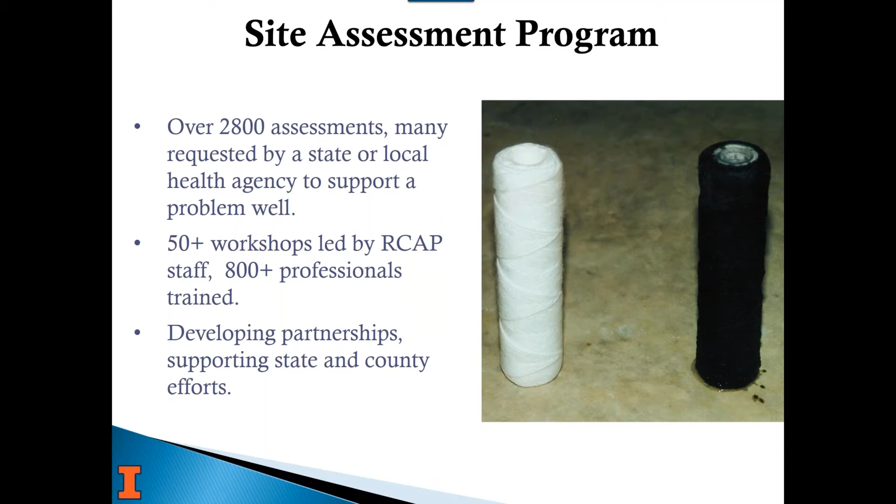So quickly, a little bit about the State Water Survey. We're a really unique agency. We're a sister agency to our State Geological Survey. We're on the campus of the U of I, but we're the only water survey in the country. I think Oklahoma may have started one a number of years back, but we were started because of cholera and typhoid outbreaks. And so we've been dealing with public health and water quality since then.

A lot of engineering, developing groundwater models, looking at water quality. We have a lab that until 2008 offered free water analysis to any well owner in Illinois. State budget problems changed all that. But we also house all the state's well logs. And so in our files, going back that far, there's a lot of really cool information I've been lucky enough to be involved in going through.

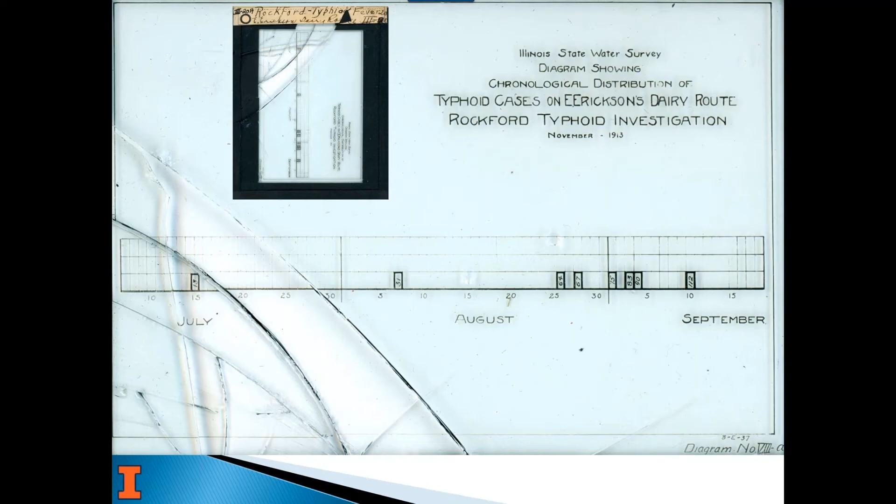Just looking at things like, when a filter plant was installed in Quincy, how it changed the typhoid rates going back before 1900. And this is an investigation of a typhoid outbreak in Rockford, Illinois. They went so far as to investigate if it could have been the milk. And E. Erickson had a dairy route. And obviously, this shows that by September, there were 112 cases, and the dairy route only had 7 or 8 of those. So that wasn't the case. But this is an old glass plate slide that's in our files that dates to 1913. So there's a lot of cool history we have, and I guess I'm kind of proud of all that.

So getting on to what we're here to talk about today. The things to remember if you're a private well owner are that they're not regulated.

Once they're installed, it's really up to you as the owner and the user to be sure your water's safe to drink, and you can't go by taste or smell. A lot of people have problems with sulfur, that rotten egg smell. It's not necessarily dangerous, just like iron stains everything and it's not necessarily dangerous.

But many things that are dangerous, like arsenic, are colorless, odorless, and tasteless. So you can't judge your water by how it looks, smells, or tastes. You really have to sample. I grew up on an old dug well that was not safe. When it rained hard, we had cloudy water.

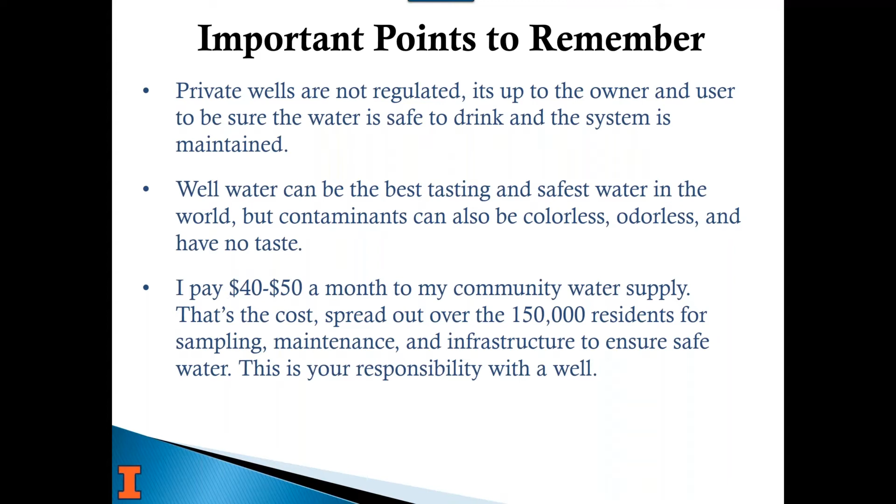And that's your responsibility as a well owner. The best way you can look at it is that you're the water operator for a very small water system, your family's, and take it that seriously. And so that's really the take-home message.

What we hope you get out of not only this webinar, but our program, is that you learn more about your well so that you understand where your water is coming from. Is it a sand and gravel well or a bedrock well? How deep is the pump set? Is the pump in your basement, or is it down in the well? Is it submersible? Do you have a screen or not?

All those things, as well as who you can talk to locally to find out if there's naturally occurring contaminants. Arsenic is a common element in the Earth's crust, and so we see a lot of areas around the country where there's naturally occurring arsenic, and it's just the way it is. But you need to know if it's there. Other areas may have things like uranium or radium. I'll talk more about that as we move through today.

But the point of our class is to give you enough information to understand your well and how it works, your geology and how it works, how water gets into your well, so that when you have a problem or a question, you can ask the right questions and not questions that indicate that you are brand new to a well and have no idea how to take care of it.

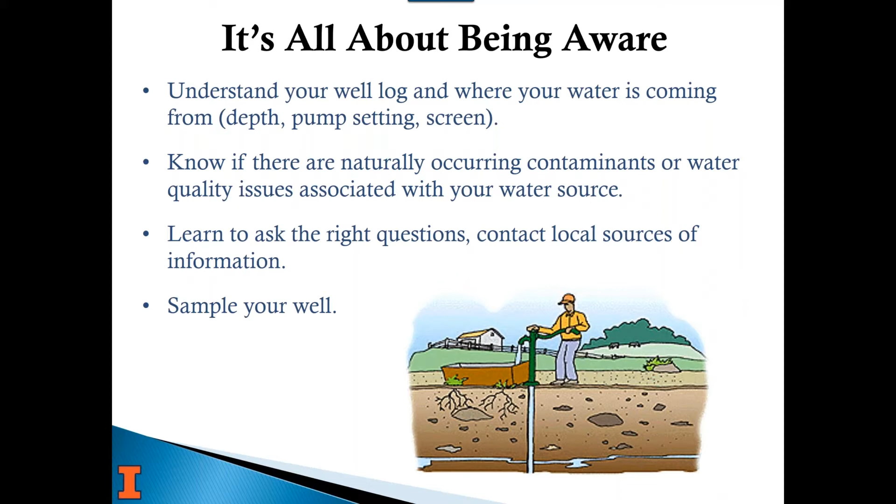And lastly, sampling your well is the most important thing you can do. Even if you have a properly constructed well and there's no natural contaminants, sampling your well just ensures that you know what's going on with your water quality.

The porosity is a measure of the volume of the actual pore space or air space between all those grains versus the total volume of that box. Typically in a uniform sand, we'll have a porosity of close to 30%. What that means is that if you're in a sand and gravel aquifer that's 100 feet thick and fully saturated, if you took all the sand away, you'd still have 30 feet of water below ground.

So they're very prolific when they're large sand and gravel aquifers like that, because water can move through them so easily. You see a lot of areas like along river bottoms where there's irrigation and they're pumping 1,200, 1,500, 1,800 gallons a minute. And they don't see a whole lot of drawdown because water can move to the well quickly and there's just a lot of water available.

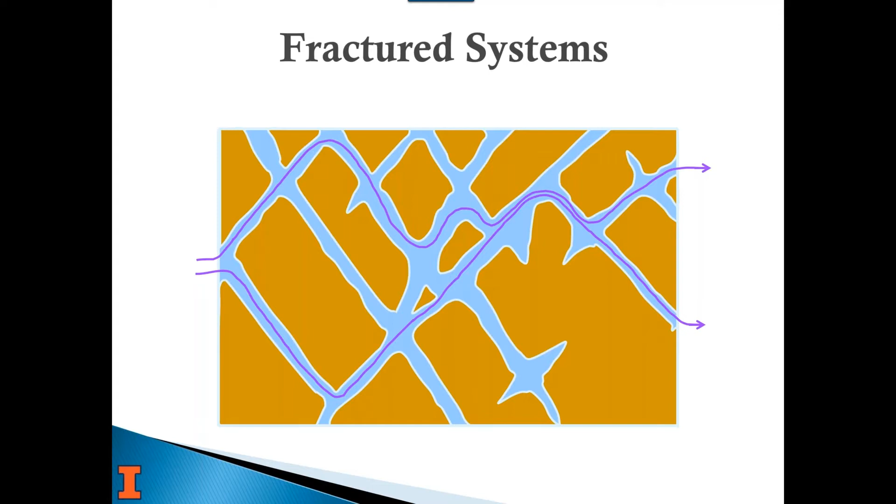Versus caverns and limestone, when you think about Southern Illinois, Indiana, Kentucky, Tennessee, other places that have caves and large caverns, karst topography, those are water dissolved openings. So those fractures are continually getting a little bigger. And over time, with water flow, especially when the glaciers melted, a lot of big caves were formed. And so those store a lot of water.

So we were talking about permeability and how fast water can move through. If it's a large fracture, water moves through like it's free flowing, like through a cavern. But typically, when you start looking at things like shale, shale is really cemented clay, and so it can move as little as 1 foot in 100,000 years.

And so what we typically see in bedrock is you have units as you move down, geologic units, and you go through one, and so you might have a sandstone or a limestone, and then a shale, and then another limestone or some other type of formation that holds water or is fractured. And the shale acts as an aquitard and separates these layers.

And we see in deeper wells, a lot of times, that if you're open to both of those, you can actually influence the water quality from one aquifer to another, because the well bore acts as a connection. And you might hit a layer that's salt water, and you can affect the water quality of your well because you went into a unit that actually has poor water quality.

But it's really about how fast water moves, and that's what permeability means. It's kind of, as I mentioned, the velocity. And so you have units that transmit more water that are considered aquifers, and units that prevent water from moving, like clay and shale, that are considered aquitards or aquicludes.

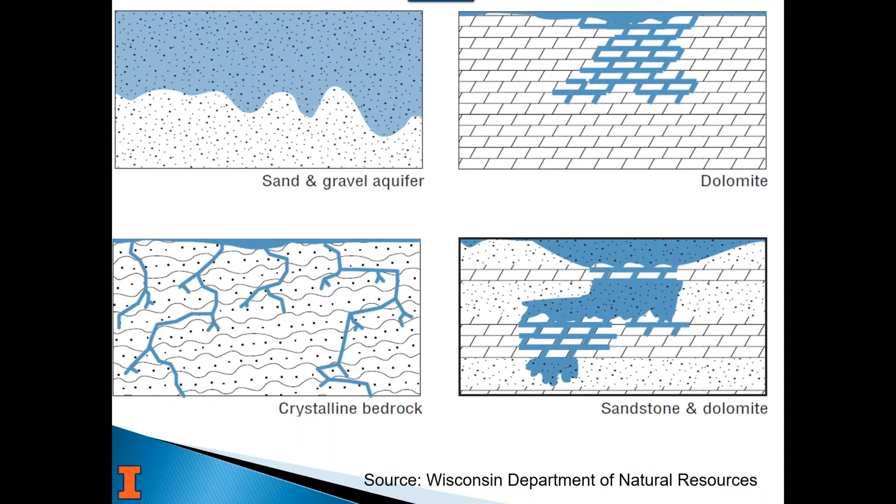And usually these bedrock units are not flat straight across; they're at an angle, and so it depends on where you're at. In one place, the aquifer may be near land surface, and 30 miles away, it may be at 1,600 feet because of the angle of the rock in the ground. It's not flat. Here's another good example of how that works.

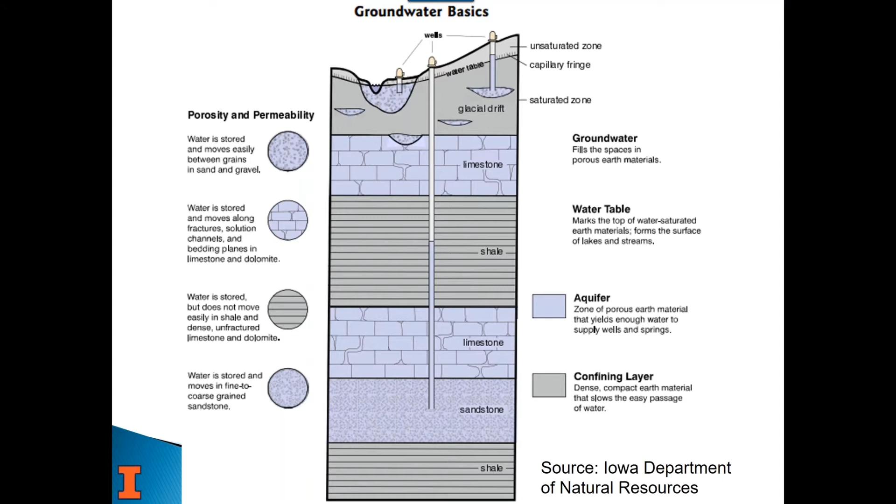I apologize. Boy, we need to redo this figure. It's very blurry, as I notice.

This is really meant to show how water flows. So water is part of the hydrologic cycle, right? Our groundwater is part of the hydrologic cycle. And so the typical cycle you see is it rains, it runs off to a stream, ends up in the ocean, and then it evaporates and starts all over again.

The water that's near your well today will be down gradient in a few days, moving towards some discharge point like a stream or a river or a lake. And so it's a continually moving process. That's why when you hear about plume of contamination, it's because the groundwater is always moving.

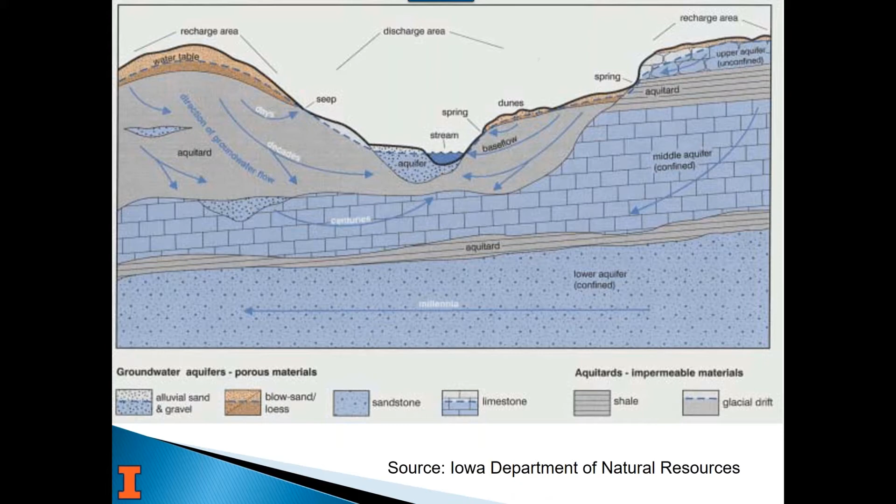So if something gets spilled, it's going to move towards some discharge point. And whether it makes it there or not, or whether it gets broken down before it does or whatever, there is always constant water movement. It's not just sitting still down there waiting for you to pump it.

So a little bit about aquifers and wells. There's three types of wells the way we define it. There's dug and bored wells, which are large diameter, and typically you put a dug or bored well in because there is no aquifer or it's too deep.

I grew up on a hand dug well. It's 3 foot diameter. It's only 14 feet deep. My grandpa hand dug it in 1933. He didn't realize at the time that 80 feet down is a sand and gravel aquifer. And so we had this old dug and bored well.

But if you know there's an aquifer, you'll drill a well, either into sand and gravel or into bedrock. And so it depends. Sometimes you have choices. There may be 2 or 3. Like the shallow sand, if it's too shallow, may be a risk for surface contamination, so you drill deeper, or your driller may explain to you why you might want to drill into this aquifer instead of that one.

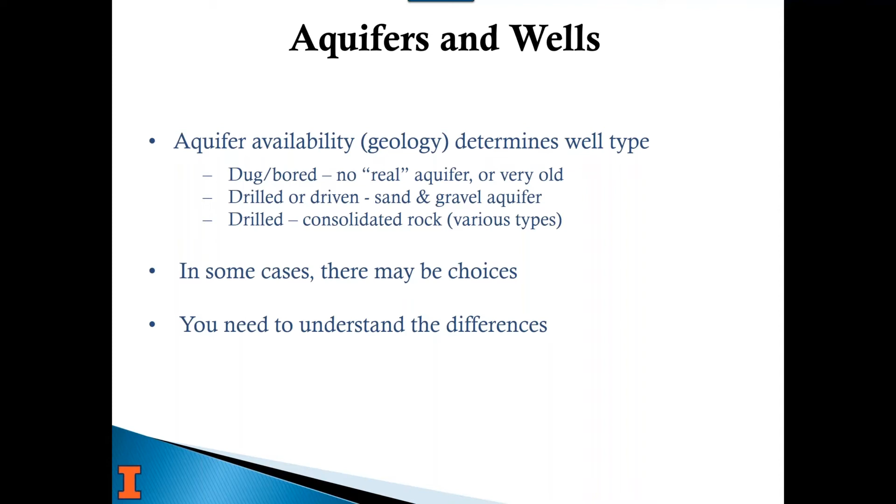But it's up to you to understand the geology and the differences, or talk to someone that's independent, which would be like your state geological survey or your USGS office or your water resource agency in your state. So we're going to go through these. So these are all dug and bored wells.

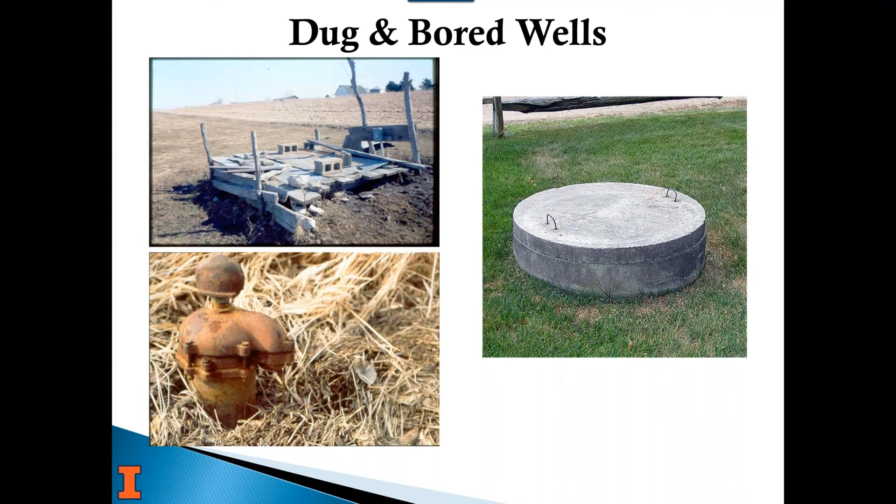And the one on the bottom left is just like the one on the right, except that the 3 foot tile doesn't start until 10 feet down. And that concrete pad has a hole in the top of it for that steel casing. And so it looks like a drilled well, but it's actually not. It's a large diameter well that was bored by a boring machine. So these are those 2 installations, the 2 that are actually bored.

And so the deal here is, the reason you have a large diameter well that's 3 foot or 4 foot, we've seen them as large as 20-foot diameter, someone did by themselves, is so that they'll store water. So there may only be 20 feet of water in this well, and when you pump it in the morning, there's so little water that can recharge. It doesn't recharge very quickly, and so you may pump it down 10 feet, and then when you leave for the day, it slowly seeps back in, and it provides that storage like a cistern would, so that you have water when you need it.

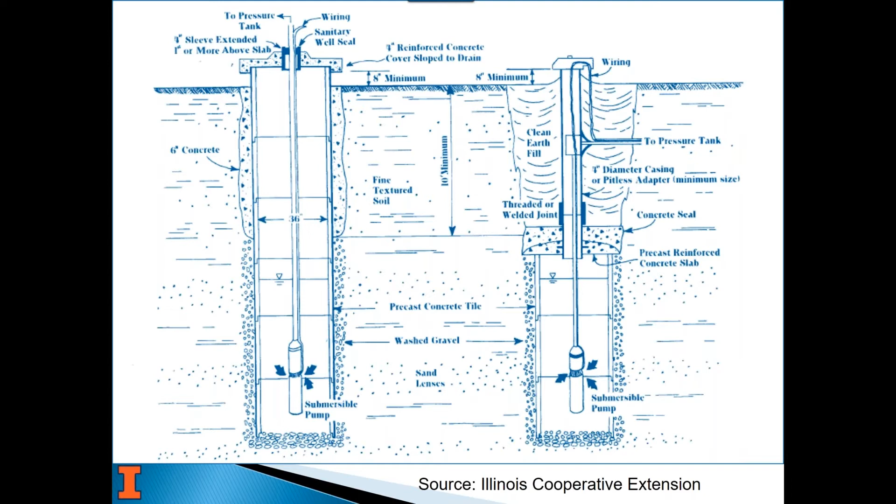So sand and gravel wells, this is a well screen. And it's really just like a screen on your door. A screen on your door lets the air through and keeps the bugs out. A screen on a well lets the water through and keeps the sand out. These are in sand and gravel wells. The casing can be PVC or steel, but usually the screen is woven stainless steel, not always. We have monitoring wells that we use PVC screens, but they're not being used for drinking water, and that would not meet code in most states.

So the driller drills into sand and gravel. He's collecting samples of the aquifer material as it comes up, and he's using the size of those grains, whether they're gravel or sand or fine sand, to size the screen so that it'll keep most of the sand out. And then the other thing you do is you put a gravel pack of uniform size sand around the screen that'll help trap all the fine sand and not allow it to get to the screen. And it acts as a filter, if you will. And it also makes it easier for the water to get there and clean water.

When your well starts pumping sand, it usually means there's a breach in your screen of some sort. That's a quick way to end your pump. They scour the inside of your pump. It won't be efficient. It could damage it. It could also damage your pipes in your home if you're getting sand in your home. And so the screen is there to keep from any of that happening. A lot of times when you start pumping sand from a sand and gravel well, you just have to abandon it and put in a new one. And so it's a bad thing.

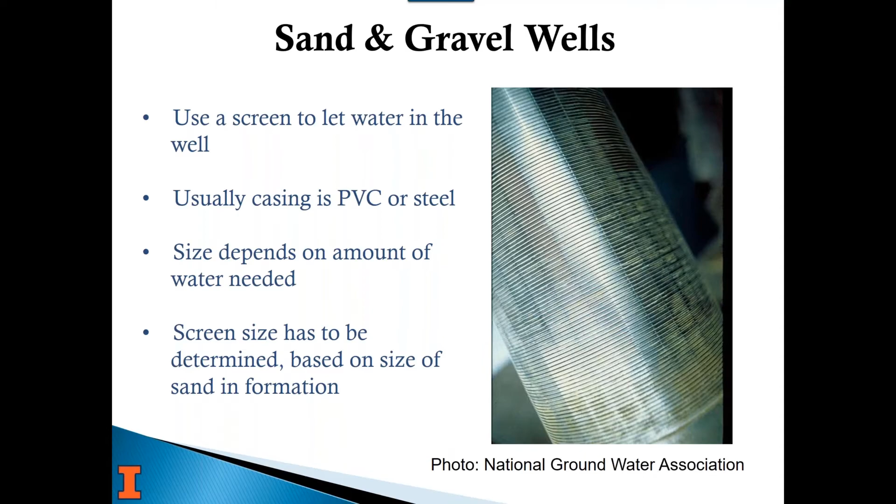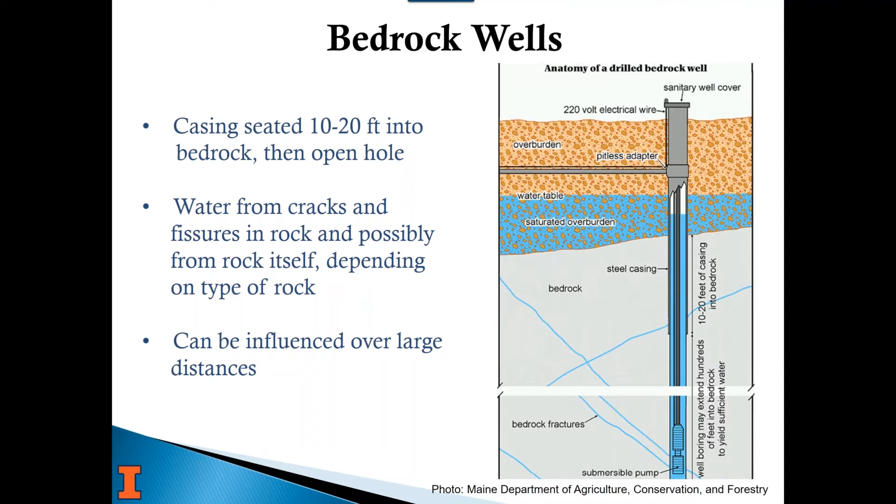Here's a typical well log. This is actually a camp in Algonquin, Illinois. I pulled these from one of our records. What's interesting about this one is when you look at the geologic formations they pass through, they hit broken limestone at 187 to 189, and the very top of the bedrock is always broken and fractured more because it's more weathered. At one point it was land surface. Glaciers came along and filled everything up above it, at least in this part of the country.

So then they had 68 feet of limestone to 257, and then they hit hard gray shale. So they went through 3 feet of it and didn't get through it, and so they stopped. They must have realized there was enough water based on how the drilling was going and the water that they were pulling out with the cuttings, and so they stopped the well at 260.

And so in this case, they put in PVC pipe to 179, which is 10 feet above where you get to bedrock. And then they use black steel from 179 to 199. And that means they seated it 10 feet into the rock. They hit broken limestone at 187. They have a steel casing down to 199. So it's 12 feet. And then the rest of that, there is no casing, and there's an open hole down to 260.

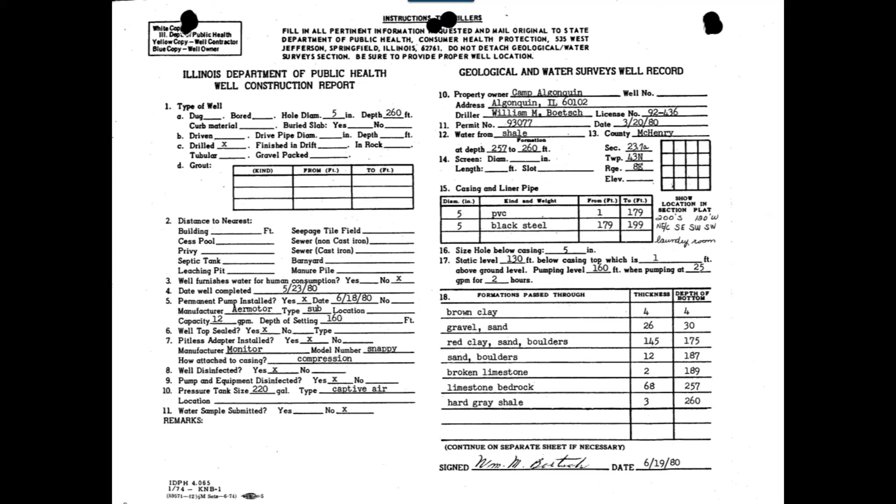But that's one way that they can use their own pump and over pump it, so to speak, and get an idea of how much it's going to use. So yeah, if you look at number 5, the pump they installed was a 12 gallon per minute pump. So it only pumps half as much as what they did whenever they built the well.

Okay, so there's lots of issues out there, a lot more in the news in the last 7 or 8 years than there used to be about private wells. But what it really comes down to is public health protection. So we're trying to protect the water so it's safe to drink and doesn't make us sick or cause long-term problems. It's also source water protection, which is the things we do around not only our well, but near where water recharges an aquifer, which is a huge issue. Whether a septic is causing a problem or livestock or ag chemicals or whatever it might be, and then just general water quality. And so those are the things we're really concerned about.

There are a lot of other things that end up being in the news, drought, flooding. There's a lot going on with flooding these days, because the weather we've seen has been more extreme in probably longer than this, but at least the last 10 or 15 years. And it's really starting to become more regular for it to be extreme. But contamination issues bring up a lot of newspaper articles and things like that.

And even boil orders. We've had water operators tell us that a boil order has nothing to do with a private well. If a community has a boil order, it's because they've had a main break in their water line. And by law, through the Safe Drinking Water Act, they have to maintain pressure in that line. So when they have a break, they lose that pressure, and that means things could get into the drinking water line for a public water supply.

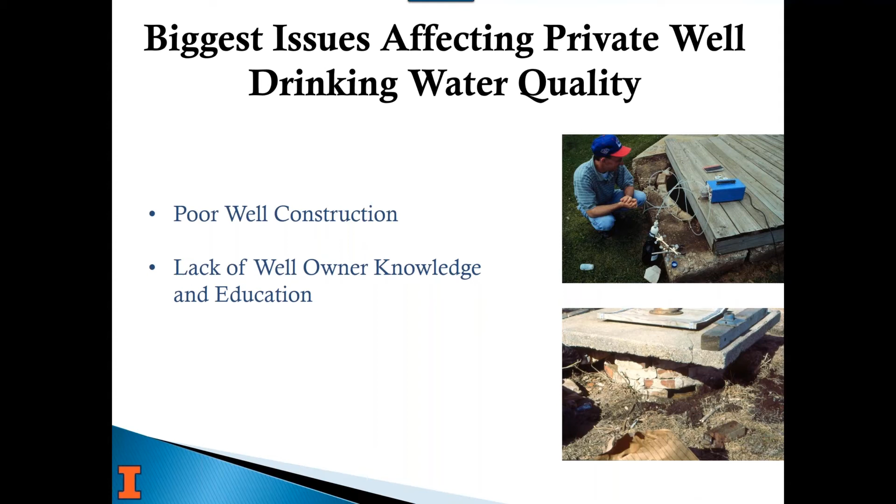And many times we get questions where they may be new to the whole idea. They've always had city water. And it's a concept that takes some effort to learn about your well and how to take care of it and what all that means. So again, those are the two biggest issues we have. And if we could solve those two things, I think we'd eliminate about 90% of the water quality concerns with private wells.

So going about correcting poor construction. Most states have well construction code, two don't. But even those codes have changed a lot. I know in Illinois, the first well construction code was in 1968, and it's been changed probably dozens of times as we've learned more about what works and doesn't work, what's safe and isn't. Materials change, all those sorts of things. But in every case, in every state that does have construction code, only new wells had to meet that.

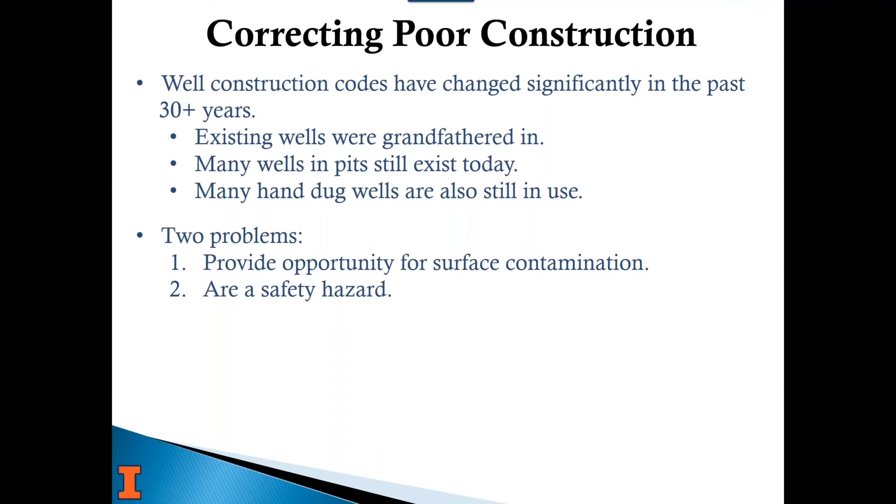So you have wells that are before any kind of code, or maybe were from the original codes that weren't as protective as they are today. And because they're all grandfathered in, we see all kinds of wells, especially in rural areas. The well that I grew up on was hand dug in 1933. I mentioned it's still in use today, and it shouldn't be. It's just that simple. It's not safe. And we still see wells in pits, as I mentioned. They're both a safety hazard and an opportunity for surface contamination.

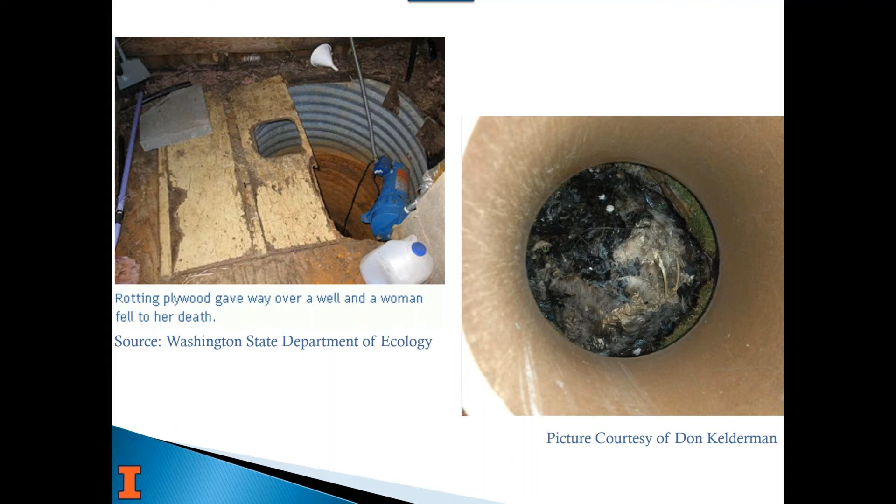So what should you do? If you can, bring it up to code, talk to your state agency that has well construction code. You're doing this voluntarily. They can't make you, but you want to do what's going to protect your well water from any kind of surface contamination or worse. So if it's a well in a pit, for instance, you can extend the pipe up to land surface and fill that in, and install a pitless adapter if you need to.

A pitless adapter is a unit that fits in a well that allows you to basically elbow your pipe from your submersible pump into your home at like 3 or 4 feet depth. That's typically done when you have a frost line, so in a northern climate where you have freezing weather and there's a frost line in the soil every year. In some areas we see all the equipment out by the well, like the pressure tank and everything else, because it never freezes in some southern climates. So it's different depending on where you live.

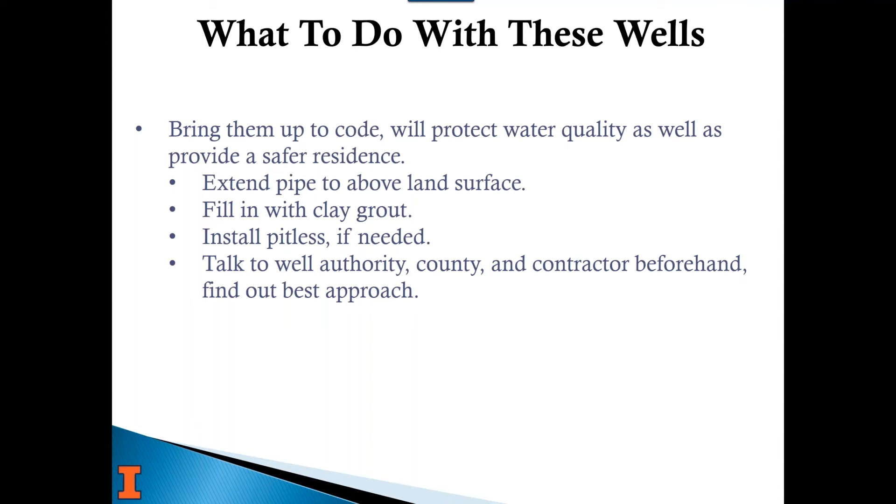But talk to the folks in your area that know how to fix those things, have them take a look, ask if there's anything wrong, especially about your well casing and making sure your well's properly protected at the surface. Same thing with abandoned wells.

Since well logs weren't required to be filed until the 60s or 80s or even later in some states, there are many more wells out there that we don't have records for, and that's in every state, than there are wells that we do have on file. As an example, Illinois passed a law in 1968, and I did a project where we were trying to identify all the wells in 9 rural townships. There ended up being 1,706 wells. In our files, we only had logs for 788 of those, so less than half.

And you have other states like New York where they didn't pass the rules to require a well log to be filed until 2000. So they estimate they maybe have 10 to 15% of their well logs on file of the wells that are actually out there and in use. But many more of those old wells aren't even in use anymore. The old house was torn down, the son or daughter put a new house in, they decided to put in a new well. That old well just sits there, everybody forgets about it.

And they're not only a safety hazard, but also a source of contamination if they go down to the aquifer. Anything that gets spilled there or can get in it, or eventually, depending on the type of casing, it will go bad. So the best thing to do is to properly abandon and seal it, so that nothing can get in it and no one can get hurt.

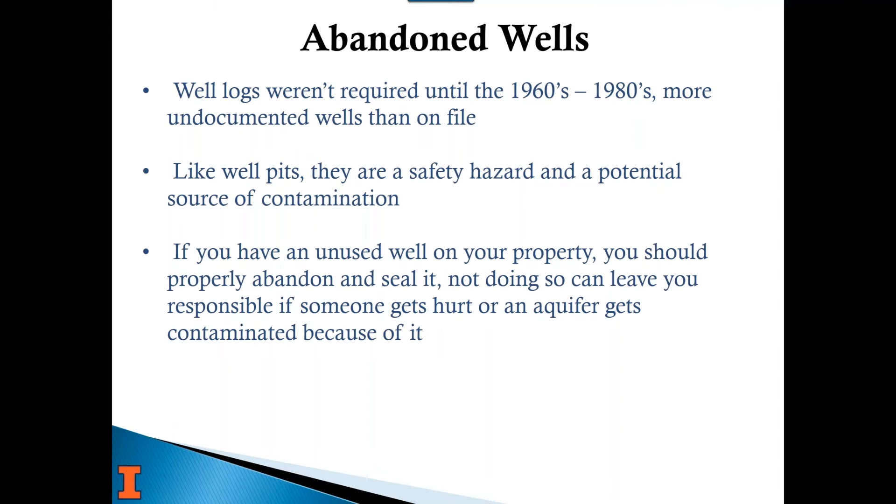It was covered live on CNN for over a day, I think, and they dug her out and she was fine. She's a mother of 3 today, but some people aren't so lucky. They fall in a well, and a number of people get killed that way.

Okay, so aquifers versus aquitards. An aquifer is the unit where you're getting your water from. And in my field as a groundwater hydrologist, an aquifer can mean different things to different people; what is an aquifer to one might not be to another. So for an example, if you have a home and you need to pump 5 gallons a minute, you might be able to put your well in a specific geologic unit that'll pump 5 gallons a minute.

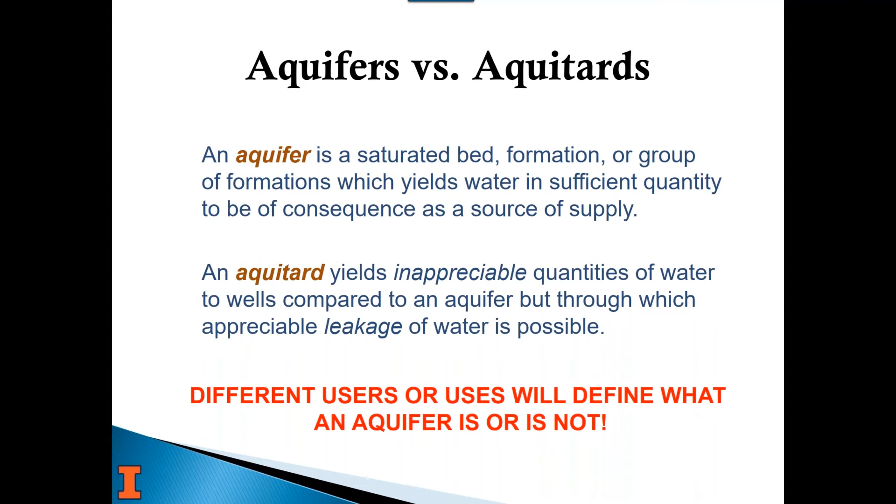enough of that. So whether it's confined or unconfined: an unconfined aquifer is one that's really not full. It's got a free surface, so it actually has air. It's open to the atmosphere. And so the water table is such a thing, and it's considered a water table aquifer, versus both examples I used of those wells, where the water level in the well came up above the top of the aquifer. That means it's confined. It's under pressure. So the pressure in the aquifer is greater than atmospheric pressure.

And so how far it comes up in the well is a matter of the extent of the aquifer and where that pressure is coming from. So you can think of it like a juice box. If I put a straw in a juice box, nothing happens if I'm just holding the juice box. But if I squeeze it, then juice shoots out the straw. And that's what a confined aquifer is. There's external pressure somewhere away from your well that's causing the water level to rise in your well up above the top of the aquifer.

And that likely means that there's a recharge area somewhere farther away where the water levels are higher, because water wants to be flat, right? You think about water in your bathtub, it's all one flat surface at the same elevation. If you pull the plug, water starts running out. Where's all the water run? It runs to that low spot. So it's the same thing as if your drain were a well that you're pumping. As you pump water from your well, all the water surrounding it's running to it to try to make it level again.

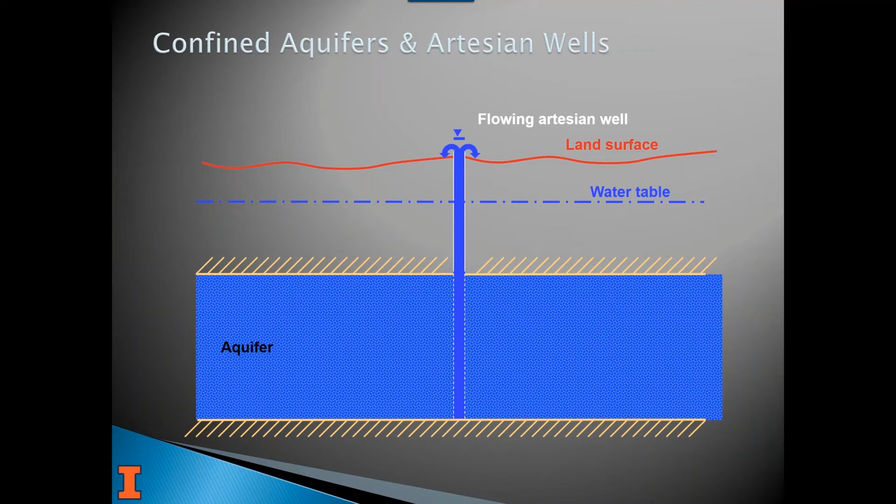We have a few small areas in Illinois and in a number of states. There are areas where, just the way the geology is laid out and the elevations and where the recharge areas are for some aquifers, you can have these flowing well situations. So we're updating this figure because it's really poor, but I'm going to use it today.

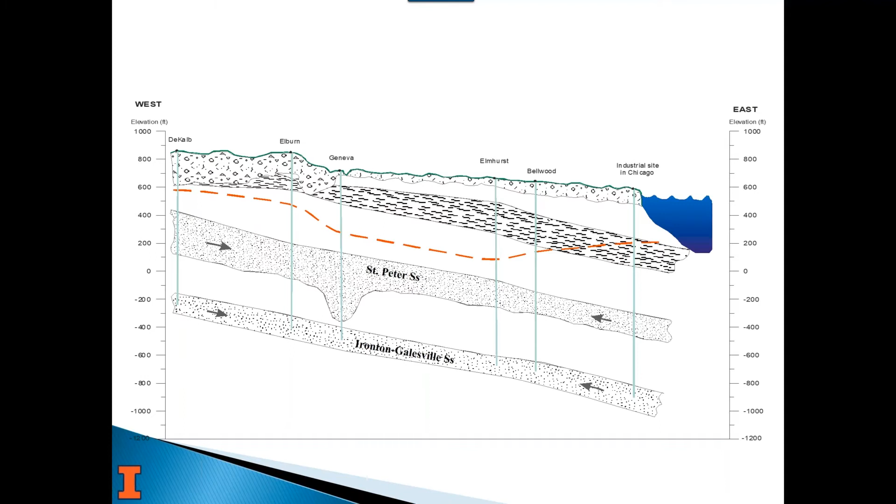And there's more pumpage in the middle of this image. And because of that, water is actually flowing just like the arrows show. It's flowing into the middle both ways towards those wells. And so it's basically reversed the flow direction on the right, and it's coming towards the middle of the picture. And that's what can happen when you pump a well. And so you have to measure water levels to understand what those are, and that's why these diagrams are both in elevation. That's elevation of the water as well. And so yeah, that's how it works.

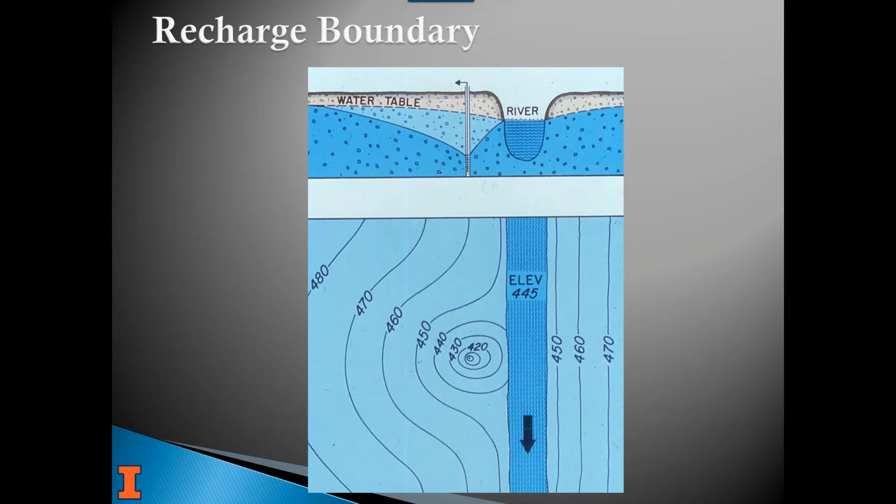And so all of those things matter when you have a well, and understanding where you're at. You see a lot of folks who buy these 5 acres on a bluff overlooking some nice stream or a small river, and it turns out up on the bluff there's no water. And so they end up putting their well down in those bottoms along the stream. One, you have to be careful about flooding, but that's because it's all this sand that was the ancient river bottom that now is a prolific aquifer, and that's why the well's down there.

So I'm going to show Illinois' example, but I want to make sure everyone's clear that there are a number of states that have this very similar application. I don't know if they all share it between the geological surveys, but there was a question today about Idaho, and I got online, and their interactive map application is almost identical. It's very similar. And so through the Illinois State Geological Survey, we're sister agencies and we share information.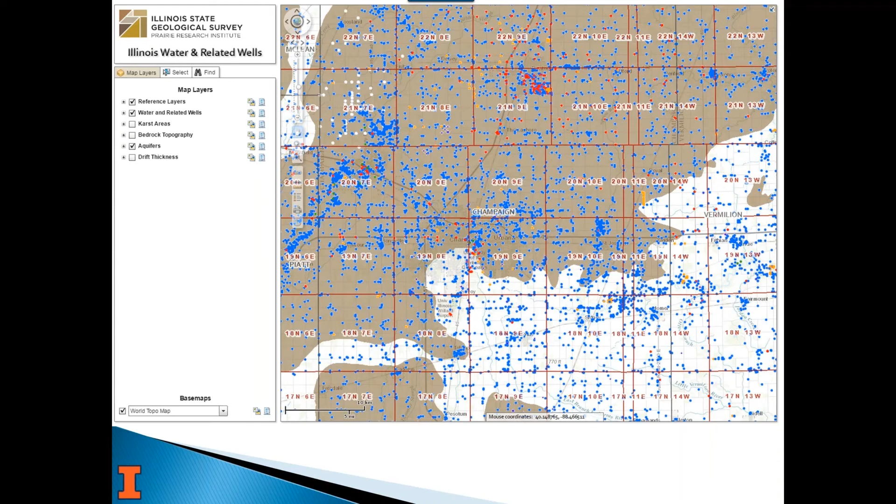And so Champaign-Urbana and the University of Illinois are kind of on the edge of the Mahomet. It's the water source for our community. The wells are west of town, but you can see all the wells that are actually out here. Lots of water wells. And so if I zoom in, this is the airport on the south side of town,

and I've clicked on a well, and it says I'm looking at the second of 3 that are at this location. So wells are typically located by legal description in a 10-acre plot. And so on a 10-acre plot of land, if you have acre lots, you could have 10 wells. And so sometimes they're on the same thing here. But I'm looking at the second of 3 wells. It says who the owner is, when it was drilled, how deep it is.

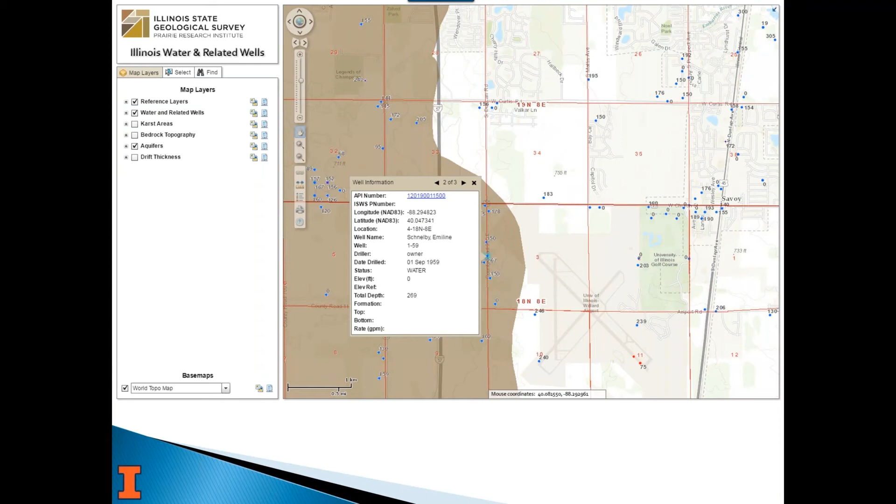And then if I click on the API number, which is the Geological Survey's nomenclature, numbering system, ours is different. You can see this, and it's a generated log from their database. So they've entered all of the geology and everything else. You can see some details. This isn't everything that's on the log, though. If you remember the log that I showed earlier, there's a lot of other information.

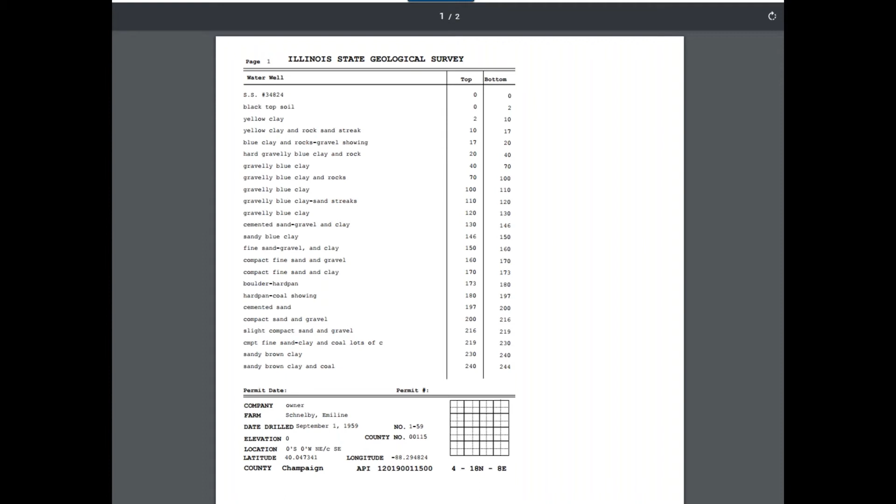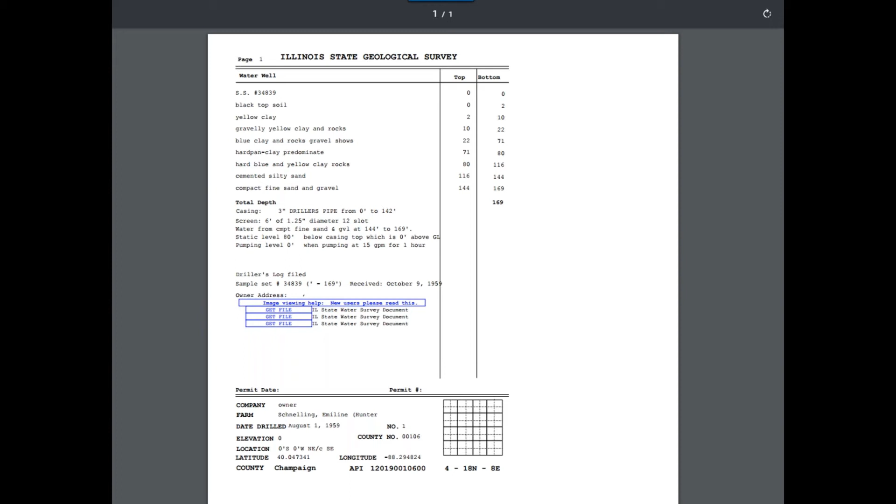To get that, you'd need to go to the actual logs themselves or ask for a copy from the water survey. We're trying to integrate all this. We've scanned a lot of our well logs. And so for this particular well, the blue is also an image of this particular well's actual log that was filed. And so that brings you to this, which was filed in 1968. This is the original log that we've scanned and have in our files. We have the paper record here too. So you can find a lot of information.

Things that are important to understand are who was the original landowner when the well was installed. That's the best, because I'm fairly sure that the Schnellings aren't there anymore in all likelihood. It could be through 3 or 4 homeowners since then, and so you're not going to find it by any of the others. It's going to be whose name is on the log when the well was installed.

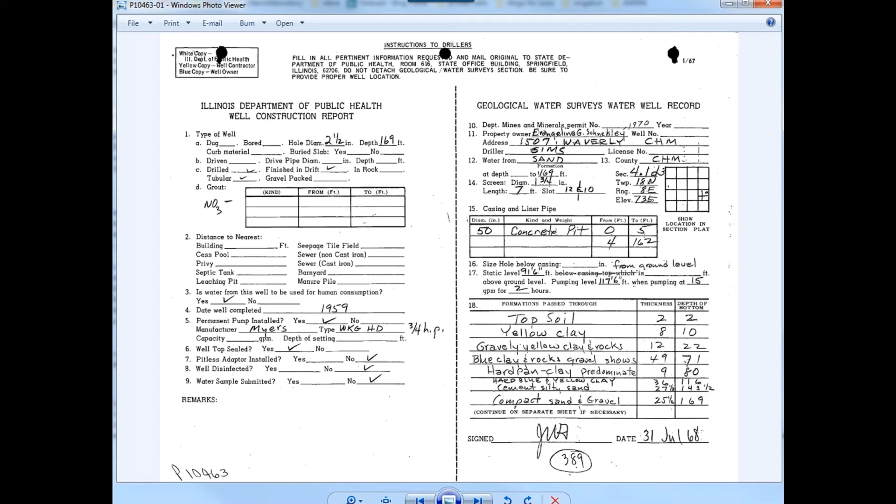And that's one of the biggest problems, is figuring out all the information. A good thing I'd recommend doing is you can go back to old plat books, which should be in your county records, to try to find all the names of who might have owned that land. That's one little trick if you're trying to find that stuff.

So I want to talk a few minutes about the private well class. It's 10 lessons. I want to show you just some of the basics of what we have. If you haven't taken the private well class, I certainly suggest you sign up. It's sent to you once a week for 10 weeks, each lesson. It's a PDF sent to your email, so you're on your own to read it, but it's a lot of really good information. For every person that tells us one a week isn't fast enough, another person tells us that one a week is way too fast. They're 6 to 10 pages each. They have diagrams and they show a lot of information.

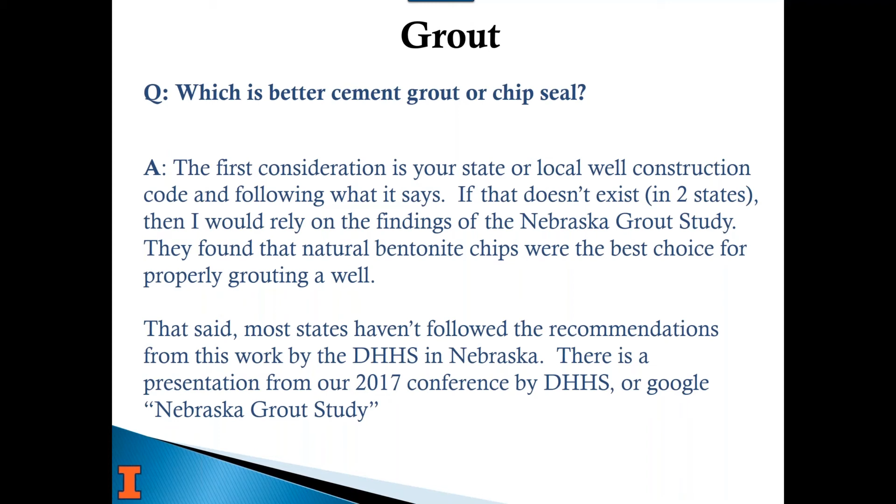We had someone from DHHS talk at our 2017 conference, and he mentioned they assumed most states would change their well construction code after that, and only 1 state did, Nebraska. New Mexico told me last year that they were working on changing their code to match this a little more. You assume a well's properly grouted, which means there's no way that could be the source of contamination. But what this study showed is that in certain geologies that may not be the case. So I would use chips. We do that for all our monitoring wells. We use natural bentonite chips, not the preformed ones. Those flake off as you're trying to get them down the well bore, but the natural chips, odd shaped, those are the best to seal a well, or the annulus.

How would I know my house's well water is good, and how can I better understand the filtration process and equipment? So for the first question, you need to test and understand if your well water is safe to drink. That's really the only way to be sure. So you need to test.

And as far as treatment equipment, if you bought a house and already had treatment equipment included, hopefully they gave you the manuals for that. If not, you can probably find them online. You just have to do a little searching, but most manuals for almost anything now are available online. And WQA, which is the Water Quality Association, and they represent a lot of the companies that make home treatment equipment, may be able to help as well. They may even have some of those manuals on their website.

But what I want to really point out is if you have any kind of treatment, you really have to maintain it and follow the maintenance procedures, whether that's a filter cartridge you have to change, or adding salt, or changing out a cartridge. If you don't, those things can become the source of contamination. If they clog up, fill up, they get bypassed, they can be a source of bacteria.

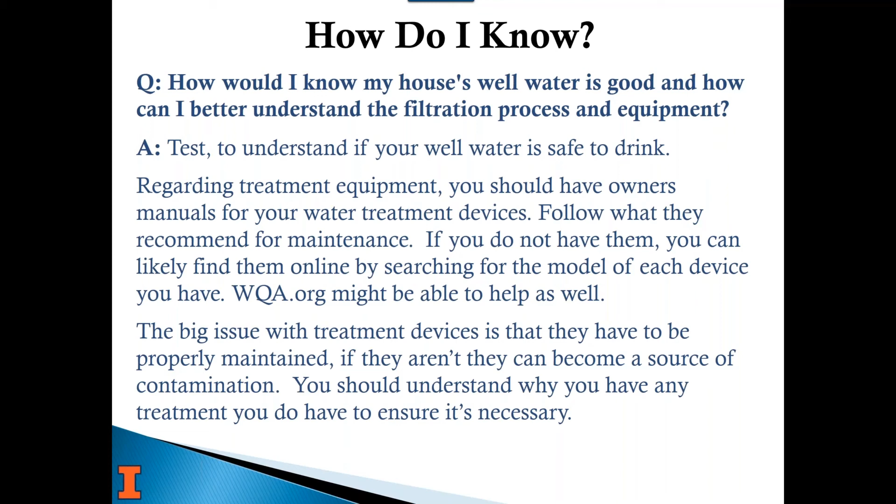Especially a lot of times you have a filter before RO, and that's so that your RO will work more efficiently. If you're not changing your filter cartridge, your RO is probably not working very well either, because it just can't. That's probably the biggest thing with treatment equipment, is you need to follow the maintenance schedule you're provided. And just, well, I can get 2 more months out of this. You start doing those things, and you may be affecting your water quality and what you're actually drinking.

What are the regulatory, chemical, and biological testing requirements for private wells based on population? And what tests are recommended even though these tests might not be required? Well, so the first thing, there are no regulatory testing requirements for private wells once they've been installed. So in Illinois now, when you install a well, they have to pass a test for coliform, E. coli, nitrate, nitrite, arsenic, I think, and there might be one or two other things. But then after that, you're done. It'll never have to be tested again.

Now, there are 4 states that require testing at property transfer. The one who's been doing that the longest is New Jersey, and the state lab actually has to collect the sample. They share it with the buyer and the seller. They have to decide between the buyer and seller who's going to pay for it, but nobody else gets that data, and that's meant to protect property values. And there may be some local jurisdictions, like a local health district in Connecticut, for instance, or a county in New York that may require sampling at property transfer. But in Illinois, for instance, if I buy a home with a well, there's no requirement to test, and that's most states.

And so, as far as recommended tests, I'm going to go through what we provide typically here, just because it's worth explaining. There's a number of questions about it. It really depends on your situation. You need to know what geologic formation your water's coming from, for natural contaminants. Are there any known contaminants in the area, are there any sources nearby? A few months ago, we had a person who built their house on top of a landfill, and it makes my head hurt to think that somebody did that, actually. But it really depends. You need to ask questions. So ask your local county or state health department.

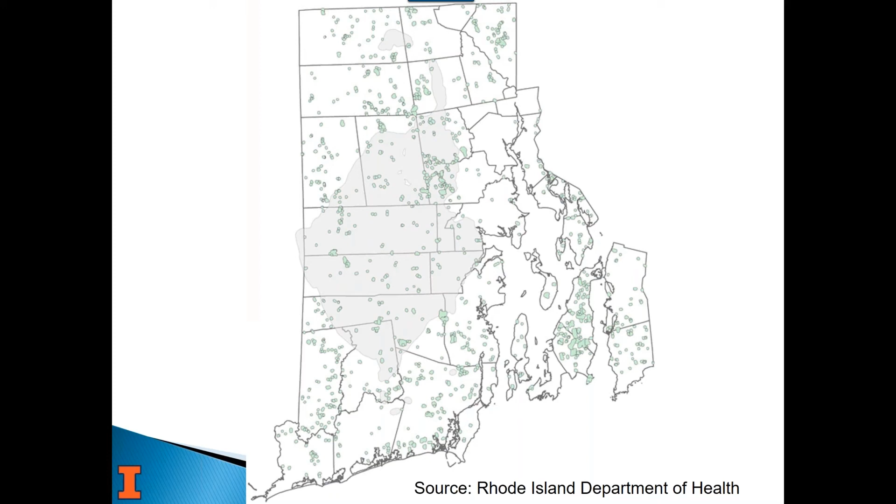But I wouldn't have thought to test or even recommend to anyone that they test for beryllium. And I wouldn't include beryllium on a list that I was going to give people all over the country to test for, but I would if you're in Rhode Island. And so you need to be a little inquisitive and look up resources that your state or your local jurisdiction might have and find out if these sort of things are a risk.

Just like Massachusetts, their DEP has this website set up based on uranium and arsenic. You can type in your address. They've done enough sampling in the state that they know where, if you have a bedrock well, it could be a problem. And so you type in your address, it'll say, yeah, you should test for arsenic, or yes, you should test for uranium, or you should test for both.

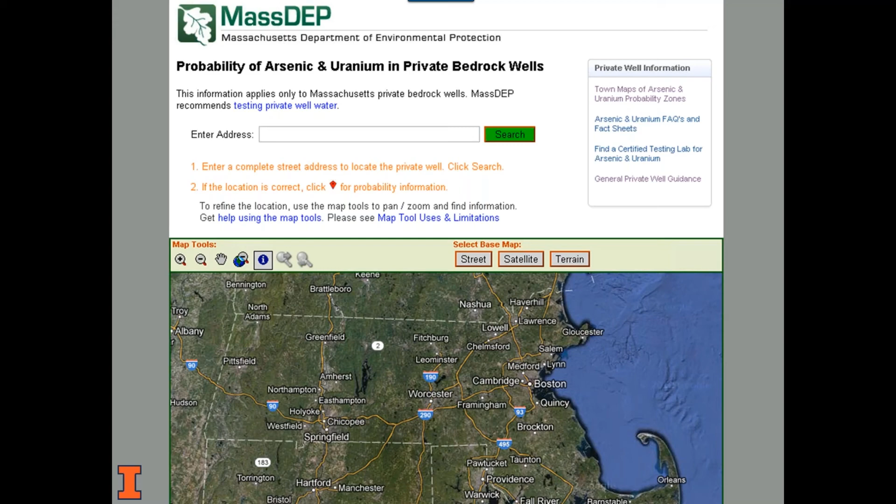So it's just a useful tool as a well owner that you can use to help identify things that you might or might not need to test for. If it comes back and says you don't need to test for uranium, that's good, because that's going to cost some money to test for, right? And then more advanced, and we're seeing more states do these sorts of things.

The Wisconsin DNR is the primacy agency for both public water supplies, and they also regulate drillers and well construction and private wells. And so they've put up this GIS platform where you can, I put in arsenic by county, and this is the results I got. Up in the upper right, you can tell it what you want to display. And so it tells me that near Green Bay, there's 3 counties where arsenic is over 21 ppb on average for the wells that they've tested there.

And so if I were going to move to the Green Bay area and I wanted to buy a house out in the country with a well, I'd know that I want to test for arsenic before I buy that. And if it needs treatment, work with the seller to remediate that and make sure that it was safe before I bought it. It wouldn't prevent me personally from buying a house with a well, but I would be more diligent about being sure that I tested before I signed on the dotted line.

And that's our advice to well owners. Anyone who's buying a house with a well, it's buyer beware. You should get it tested on your own volition, not wait for the seller to tell you it's okay.

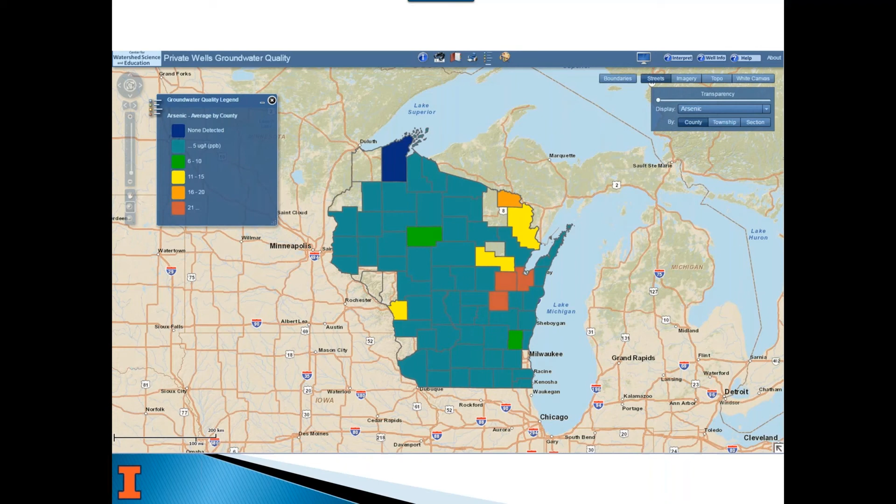Yeah. So here's what we recommend. Again, annually, coliform and nitrate, and then every 3 to 5 years, sample for this number of constituents. They help us understand, like zinc and cadmium if it's galvanized pipe, which also has lead. But having this suite of constituents really gives you a good idea of what the groundwater chemistry is, along with issues you might have.

Just for instance, chloride and alkalinity and pH together can give you a good idea if your water is going to be aggressive or corrosive, and whether or not you should be concerned about leaching copper or lead and that sort of thing. And a lot of these things should not change.

So, I have several monitoring well networks around the state of Illinois that I put in in the 90s. And one of them is in the Mahomet, where we have high arsenic. There's one well, it's a 300-foot deep well, that always has low arsenic, even though all the others around it, the closest maybe 4 or 5 miles apart, are all in the 40s or 50s. This one well is always 2 or 3. And we sample it about every 10 years. And it doesn't change, because the groundwater itself in a deep aquifer like that isn't going to change dramatically.

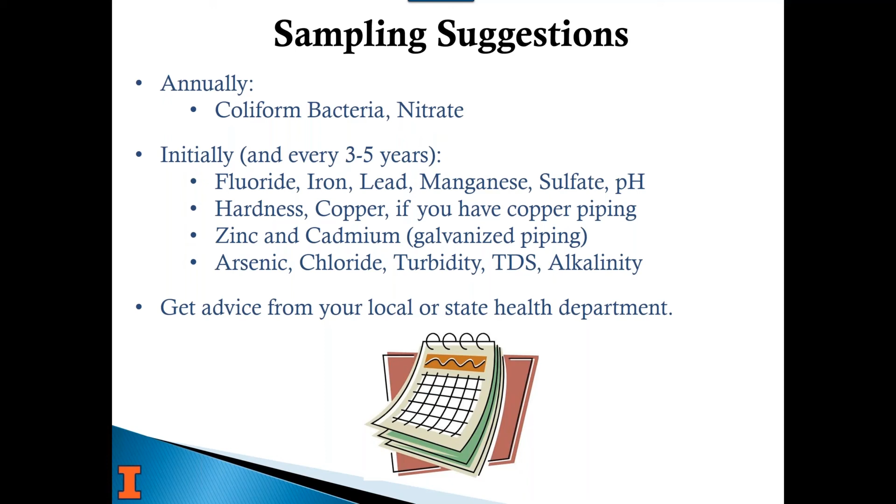And the reason it's good to do this every 3 to 5 years is if you have a significant change in any of this, your hardness changes, or the turbidity or the TDS or alkalinity change, or pH changes, that might suggest something's going on near the surface, near your well, or with your well. And it's allowed the water to change, the chemistry's changed because of something going on. And so it's always good, for your own peace of mind, to understand those things.

Because there's so many types of pesticides out there, it's really expensive if you tried to sample for pesticides themselves. What I try to make clear to everybody is that we'd only recommend that you sample for all those pesticides if you had a real suspicion that your well was contaminated, some reason to believe it was. But if your well's properly constructed and sealed at the surface and is properly grouted, and it's not a shallow, large diameter well, then it's likely that you don't have any surface influences.

If you're going to have surface influences, you'd see nitrate or coliform in most cases. And that's not 100%, but it's pretty accurate. It's really those old shallow wells that were a concern, or a well that's only 25 feet deep and there's fractured rock at the surface, or there's geologic factors that matter, and depth matters, as well as how well your well's constructed. And so you need to look at all those factors before you consider whether you want to sample for pesticides.

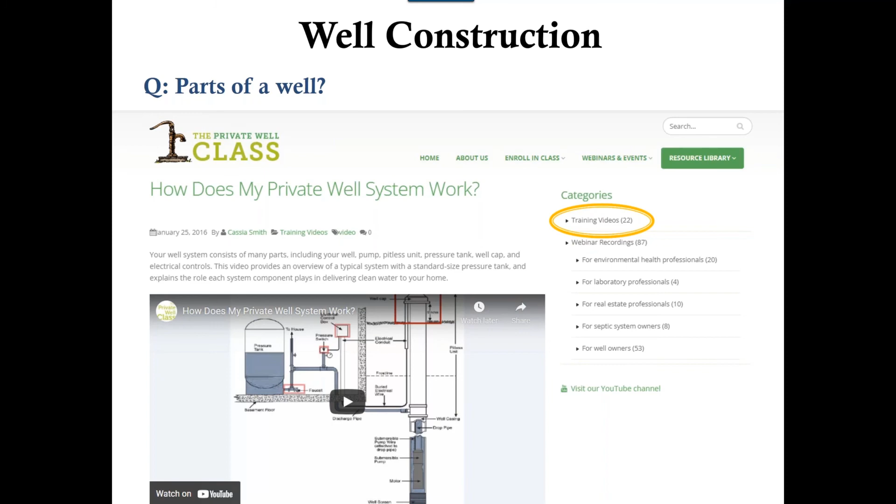But how your well works, one of the other questions, well, no, that's not the right one, I thought I had that next, but I must not. So as far as parts of a well, I'm not going to go through that because we have that information available. But I want to point out that there is a lot there.

So someone had asked about the likelihood of drilling a successful well on rural land in the Idaho Panhandle. Is there a database? So I just Googled Idaho water well logs.

And that's typically the best way to determine whether you can drill on your property, is to take advantage of all the people around you that have already drilled and the success they've had. Because the same thing goes in the opposite direction. We've had folks who have to haul water in the summer because all they have is a large diameter well and it goes dry. Either it's not deep enough, or because of the changes in our weather patterns over the last 10 or 15 years, now they don't have as much water available. And so again, you should be able to do this for every state in the country: Google your state water well logs and find the agency that deals with that information.

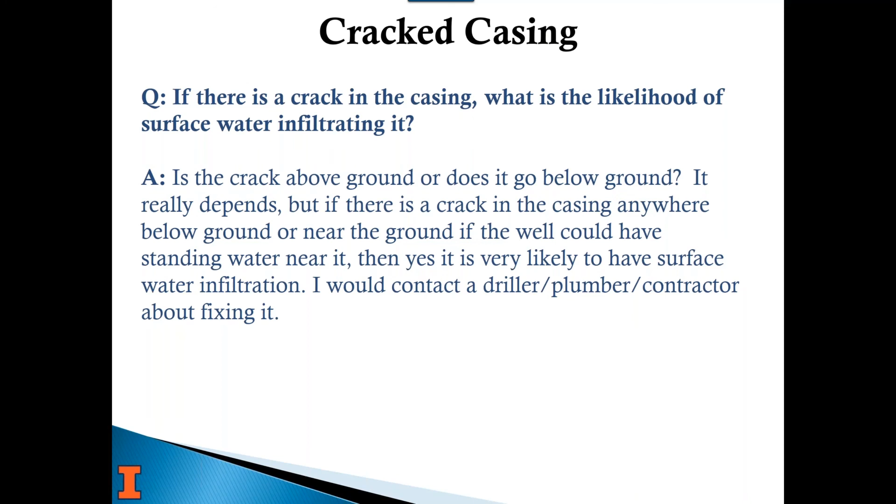How much should I budget for a new well? Well, it really depends where you're at in the country. Also, how deep you're going; a lot of them charge by the foot. What type of casing, whether it's PVC or steel, and aquifer type, meaning if it's a sand and gravel well or a bedrock well. And locally there's a lot of other considerations. I had a colleague here at the water survey who just put in a 110-foot 5-inch sand and gravel well, and it cost about $12,000.

I worked with a number of folks in California when their wells started going dry in 2012, and recently a well owner installed a 600-foot bedrock well, and it cost over $50,000, and that's typical out there for a new well. This person had a 350-foot well that went dry, and when they installed a new well, they were told they should go at least 600 feet because of the drought and dropping water levels in a number of the aquifers out there.

Katie actually called a bunch of drillers. We went to the National Groundwater Association's contractor lookup page, and we picked, I think, 8 states. We picked a random driller and called, and we asked for the same type of well, a 200-foot steel well into bedrock, and what would it cost. It ranged from around $8,000 in Missouri to over $40,000 in New Jersey. And I would say they're notably going to be higher now than they were then.

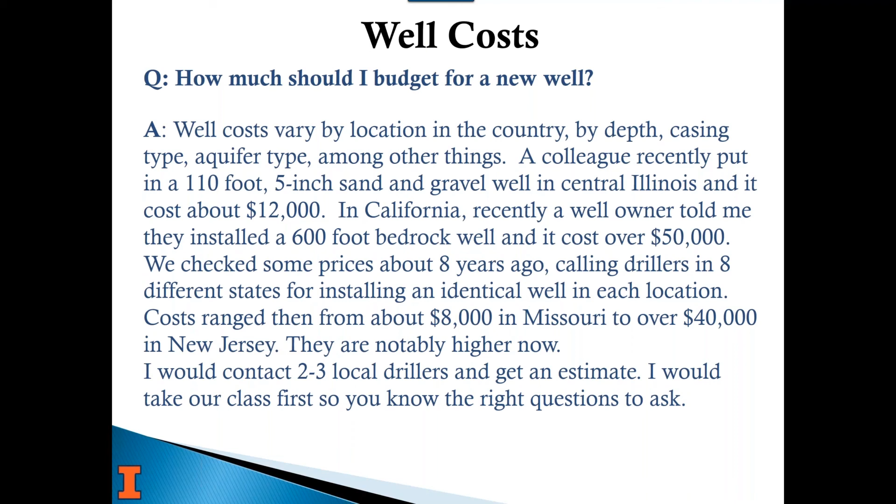Some other questions. What questions should I ask my driller? I just mentioned that. What do I not know about living on a well if I never have, and I just want to understand groundwater and wells better? All those things. There's a lot of information in our class lessons that I can't explain all today. You should go through the class and you'll understand it all a lot better. I guarantee it.

If there's ample water in an aquifer, is an open bottom well better than a gravel pack well? Well, an open bottom well means you just have a casing that stops. That won't work in sand because you'll start pumping sand. And so usually you only see an open bottom well in bedrock, in consolidated geologic units. Consolidated means bedrock. And so I'm not sure of another instance where you would have this option.

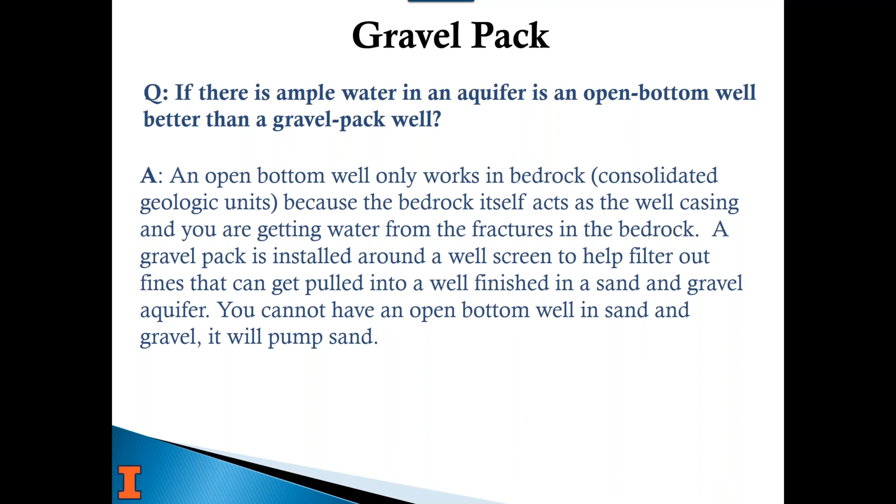But you install a gravel pack around a well screen because it's uniform size based on the screen size. It helps protect from fine sand getting through into your water in your well. And so gravel pack is certainly essential with a screen. And I guess you could put a screen in a bedrock well, but then you're casing it all the way down. But that's not the question. You can't really have an open bottom well in sand and gravel. We've talked about that already, about pumping sand and how that'll damage your pipes and your pump and everything else. And so it's usually not an option. It depends on the type of well you're drilling.

Can you explain the difference between sealed and unsealed well? There's really two ways these terms are used. Properly sealed in relation to the well cap and near surface well construction means it's sealed from anything getting in it. So a sanitary well cap with a proper gasket, it's watertight, it fits snugly over the well casing so that nothing can get in the well. That's properly sealed. The other properly sealed is in relation to abandoning a well.

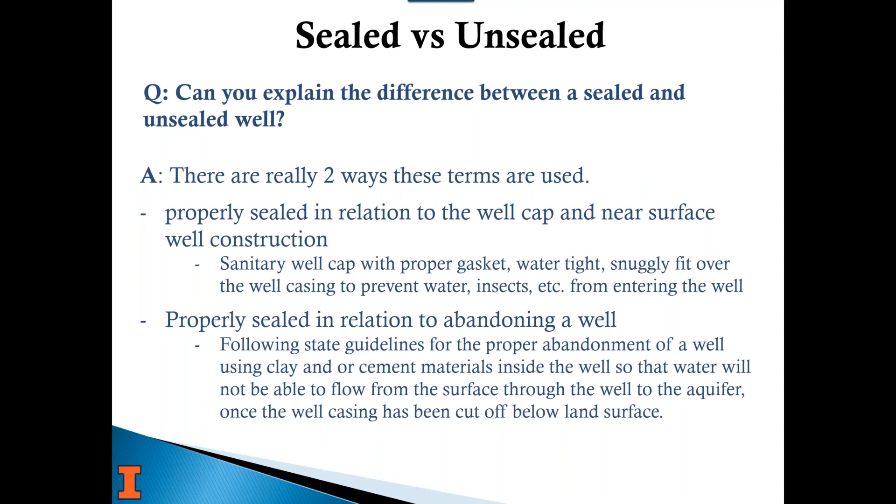If you follow your state's guidelines for proper abandonment, you put either clay or cement or a mixture inside the well, so that when you cut the well off 3 or 4 feet below land surface, because you're abandoning the well permanently, it's full of material that won't allow water through. And that's so that things from the surface can't get in your old well and reach the aquifer. And so that's properly sealed or properly abandoned. That's the two ways that I typically would use the term sealed versus unsealed.

And so we still have two questions that folks have asked, so I'm going to pull those up real quick. The Google Docs gives us the opportunity to share those. Let me make that full screen and then enlarge that. Where are we going here? It would be here. Okay, so hopefully everybody can see those.

First question is, does it damage a well to pump it dry? No, it doesn't damage the well, but it certainly would damage the pump. Most of those are water cooled if it's submersible, and if it's running, it's going to get overheated. The more you draw it down, well, that's kind of subjective. So really the honest answer is no, it doesn't damage the well to pump it dry. It'll eventually refill, assuming there's any recharge at all. It just means that you're out of water for a time, but it will damage your pump to let your pump run. And so that's what you want to avoid.

How can I get a well log if I just got a new house and never gotten one? So I guess you're saying here that you built a new house and they put in a new well? So it's possible if it's really new. Sometimes it takes a while for those to get through the system.

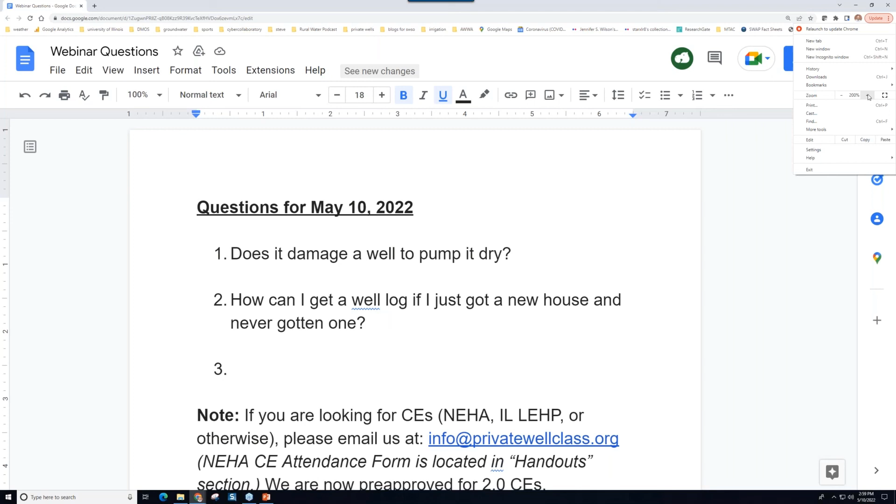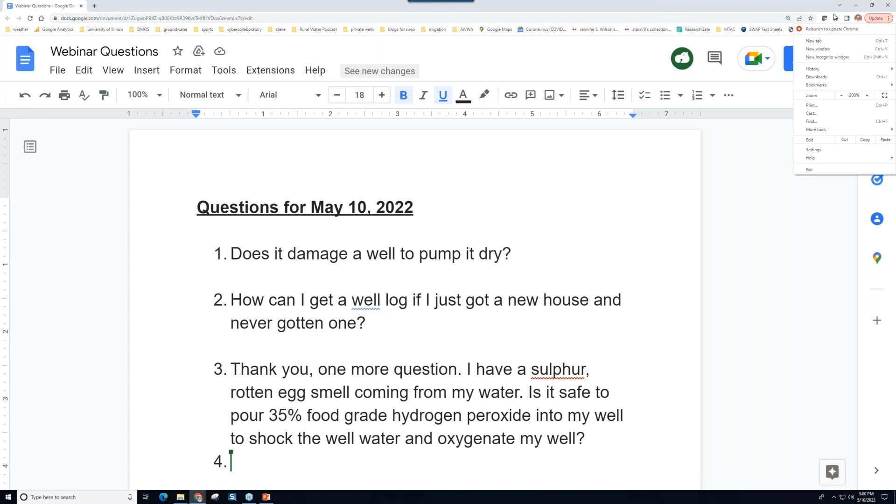I'm not sure about hydrogen peroxide. I know it's being used more. So if you have sulfur, then it's either coming from sulfate reducing bacteria, or it could be coming from other bacteria and biofilms that have built up in your well. Or if it's a bedrock well, it could be just naturally occurring. But I've not used hydrogen peroxide. I would use regular chlorine.

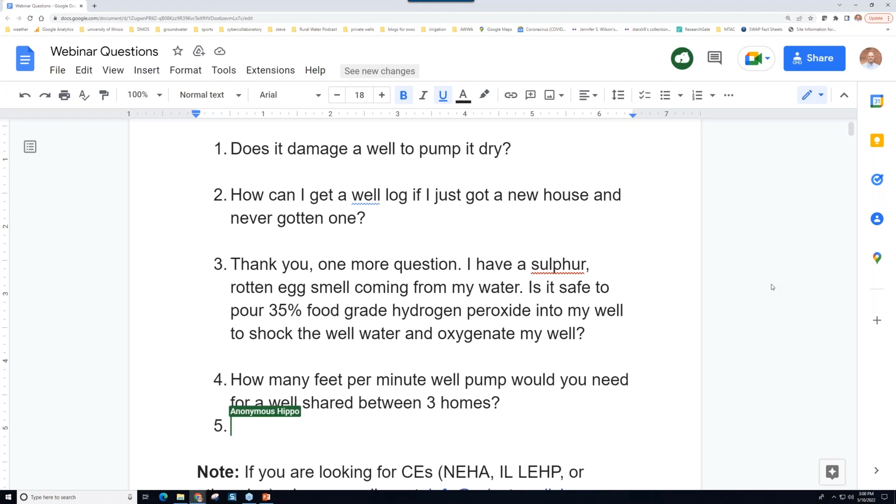And on our website, under lesson 10, I showed lesson 1 and 2 and all the extra documents that are available to give you more information. Under lesson 10, there is a guide from the Minnesota Department of Health on how to shock chlorinate your well. I would use that. The one thing I do know though is those bacteria build up in layers and become biofilms, and sometimes you have to shock it several times, and because they're naturally occurring in groundwater, you may have to go to a system where you're continually chlorinating your well if it's bad enough. And we've seen some of those cases where people didn't really have a choice but to continue to chlorinate their water in order to get rid of all that.

So, there's a lot of advantages to hydrogen peroxide from the standpoint of what it breaks down into and all that stuff. But it's apparently a lot more difficult to use because it's so reactive, and I don't know enough about it. I'm trying to learn because to me it'd be a better solution.

One thing you don't have to worry about with chlorine, though, is disinfection byproducts. You hear about those with continuous chlorination. That could be an issue depending on your water quality. But for shock chlorination, it's not, because at the end of the whole process, you're going to clear out all the water in your lines and systems so that there is no chlorine smell anymore, and all that chlorine will be gone. And so certainly for shock chlorination, I'd recommend using regular 5% chlorine.

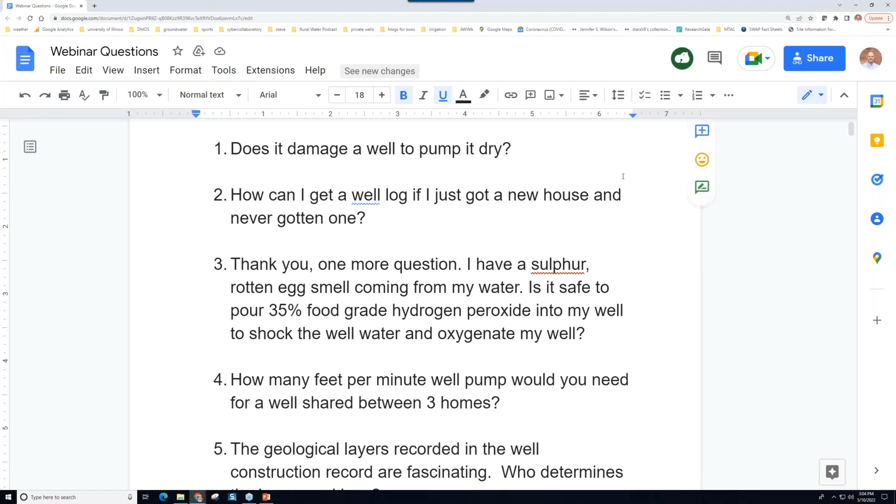So if it can't keep up, there's a new type of pump that basically is on demand. So when the pressure goes down, it starts pumping more, and you don't use a pressure tank, or it's just a 1 gallon or 2 gallon pressure tank. I don't know if that'd work in this situation or not, but it'd have to be a pretty big pump, I would think. Because when you go to a larger size pump, you're talking a lot more energy costs as well. So, not a great answer, but I would talk to a local contractor.

The geological layers recorded in the well construction record are fascinating. Who determines the layers and how? Well, the driller does, and that's honestly an issue. We have drillers who are excellent and understand what all those layers mean, and we have some who have no idea, and they put drift or terms that don't make any sense, and there's no regulation of that. But it's come a long way. Especially old logs are terrible in that respect. Most drillers today have the wherewithal to provide good information, because they realize how beneficial it is to them down the road if they go back to that area to drill again. Yeah.

But it's super important to us. A lot of the work we do is related to looking at large aquifers or large areal extent. For instance, I looked at some ethanol plants that were being proposed and how pumping 2 million gallons a day from this one spot is going to affect all the wells in an area. Understanding the geology is the key to that, knowing how thick it is, if it's continuous, and well records from well logs are the only way for us to map all that. So it's super critical to us that drillers do a good job there.